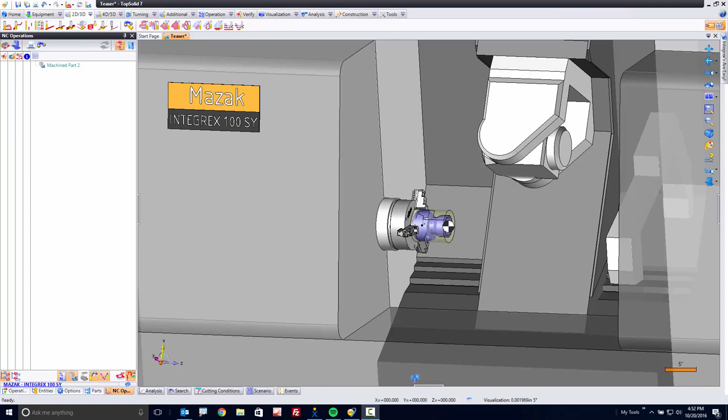Welcome to TopSolid 7. In this video, I'm going to briefly introduce you to programming a mill turn part on an Integrex 100 SY. This is the machine in question.

This is the part. Now, here I'm going to skip a few steps, and those steps are the loading of the part, the choosing of the machine, even setting up some of my tooling. But I will also tell you that I'm also working on a video tutorial that will cover every aspect of programming this part. This video is just a bit of a tease, just to let you know what's coming. So let's get started.

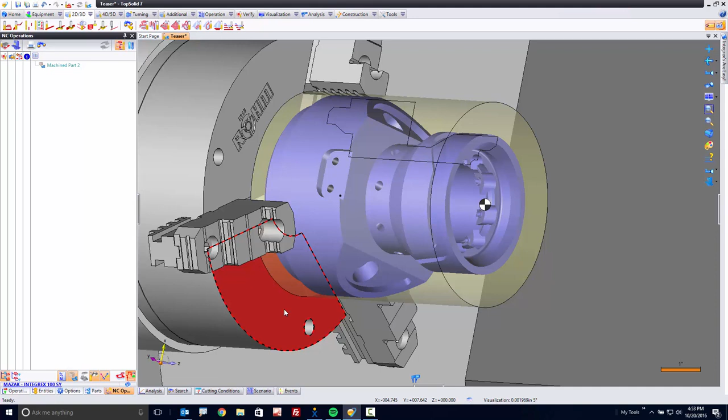To begin with, I'm going to go ahead and simplify a little bit of what I'm looking at. I'm going to go to my machine display here and turn off the ground elements. The ground elements are typically the non-moving elements. This way it's a little bit easier to see what we're doing.

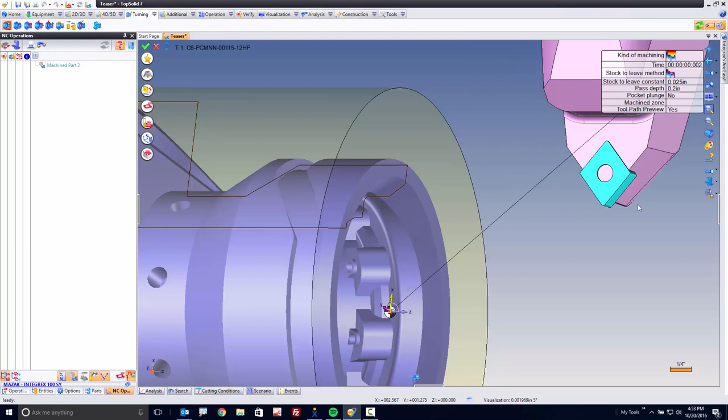Next, I'm going to zoom way up on my part here, right-click on that front face, and we're just going to go right to roughing. Now, if I put myself in a turning view, you can see I'm using a nice neutral tool. I want to machine straight down that way, but as you can see by the orientation of my tool, it's not good. It won't work. How do we change this?

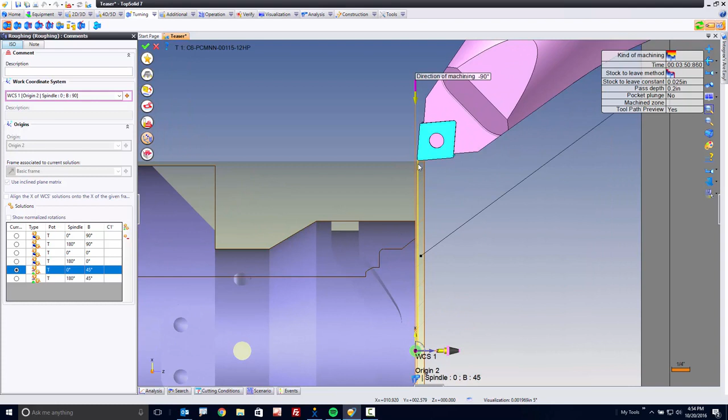We go here to our WCS solutions and we choose the angle we want to work at. So for example, I can set myself to 0 and 45 degrees. As soon as I do that, you can see the tool display updates, and moreover, you can see the tool path. Perfect. Over here, I'm going to set the stock to leave.

I want to leave 10 thousandths, and maybe my depth of cut, I want to set at 30 thousandths. Awesome. Next, I'll set my feeds and speeds. I want to work in feet per minute. So I'm going to come in here and say, you know what, I want 800 surface feet, maybe 20 thousandths per revolution. I'm going to set the maximum RPM to be maybe 3 grand in this case. That's it, I'm done. So I'm going to validate.

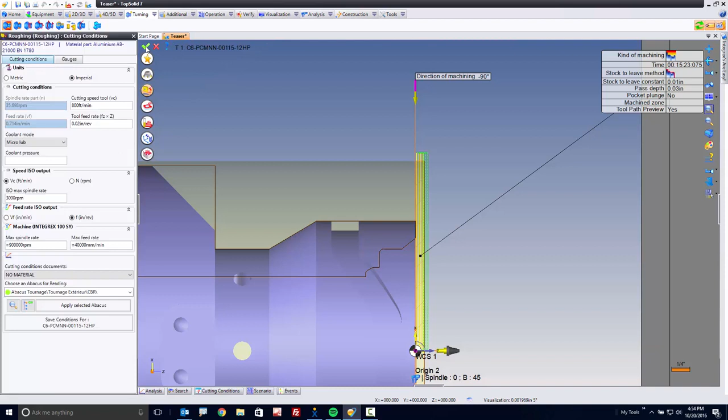TopSolid's going to calculate. It's going to go directly into simulation. I can zoom out and you can see I've turned down the face of this part. That's actually pretty easy. If you think about it, I'm using a complex machine and doing a very basic turning operation, but sometimes it's not so simple in some of the applications out there.

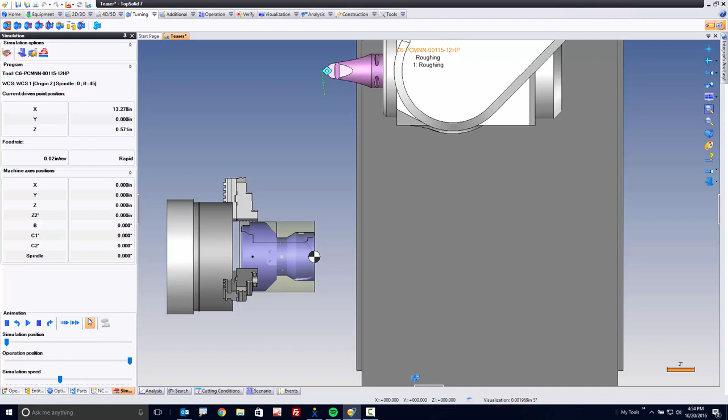Next, what I want to do is I want to continue turning. I want to turn from this face to here. So I'm going to select this face, hold Alt, select here, right click, roughing again.

Now in this case I want to reuse some of these settings, so I'm going to drag and drop down to here to use the same angular solution. I'm going to drag and drop down to here to use the same general settings. I'm going to drag and drop to here to use the same feeds and speeds.

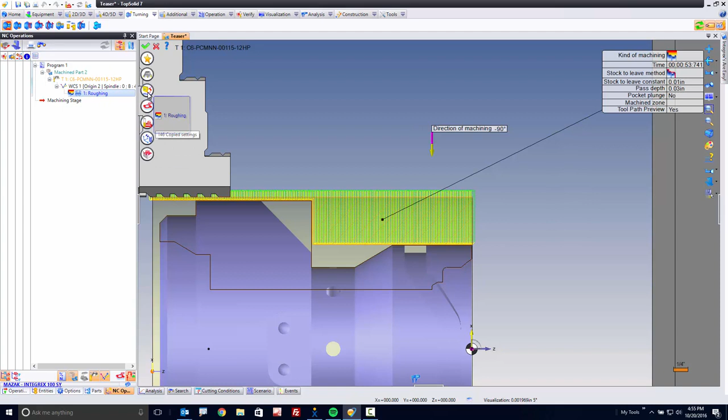About the only two things I want to change is my cut direction, and if I go into my settings, I want to stop my tool path before it hits my jaws here. One of the beauties of working in machine simulation like this, with all your fixturing present, is that you can see everything. It helps you make really good decisions.

Now, some might ask, why isn't TopSolid avoiding that? That's a great question, and the reason TopSolid's not avoiding it is because I simply have that option turned off at the moment. This way I can show you some manual steps in the solution.

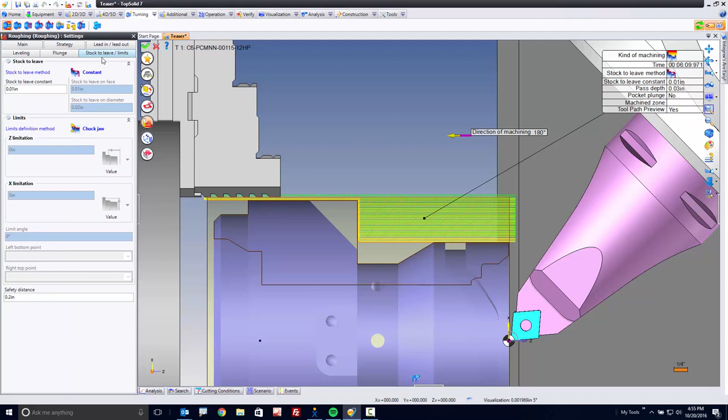So if I go to my stock to leave and limits, I'm going to turn off chuck jaw avoidance, and I'm going to go to my Z limitation. Now here, I can just type a value. I can say, you know what, -3. Let's see what that looks like. Maybe -3.5. Maybe a little bit more, -4. Perfect. I could have also switched to a point selection and snap to a point. You can do whatever you want.

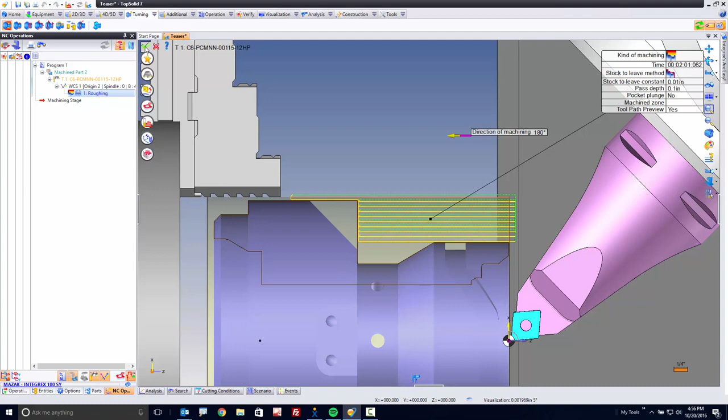The only other thing I'm going to change is I've decided I don't want that 30 thousandths step to cut since I'm turning down the length. Maybe 100 thousandths works better. And I'll say go. Like that, TopSolid's now going to update the stock.

Again, you're going to see that simulation do its thing. And we're done again. What I'm trying to point out during these videos is just how quickly and easily you can get things machined within the TopSolid solution.

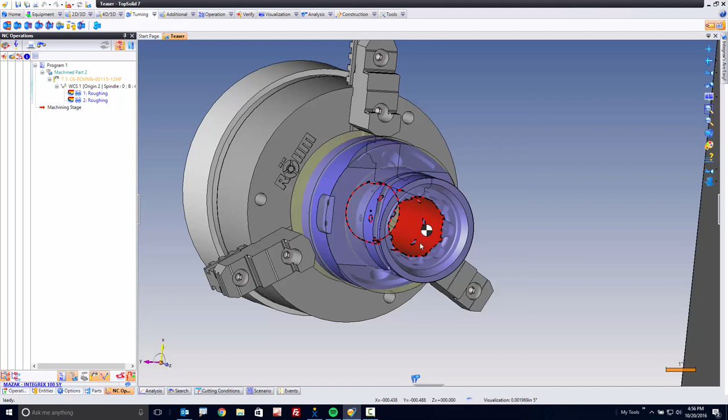Next, maybe what I want to do is drill down the center here. So I'm going to right click here, go to drilling, and choose hole machining. Now here we have a large diameter hole. And what I want to do is I'm going to use a flat drill that's 1.5 inches in diameter.

Go ahead and select that. Next, what I want to do is I'm going to tell it to take this all the way through the stock. So I'm going to change my geometry type to be through stock.

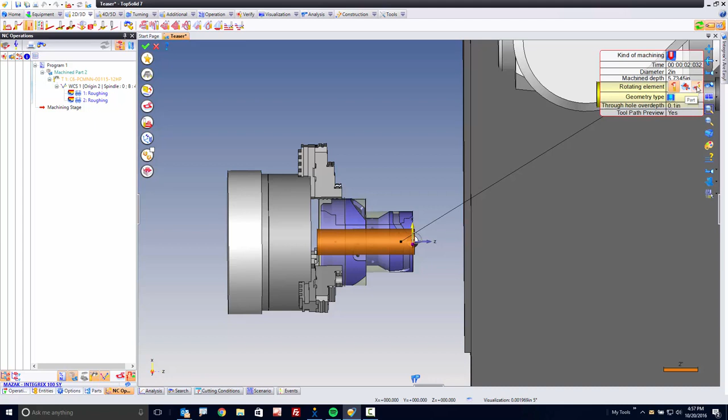Now the only thing I need to do is choose what's spinning, what's not. I can choose the tool is spinning, the part is spinning, or both. In this case, I'm going to let the part be the one that's spinning, and I'll give it speeds and feeds.

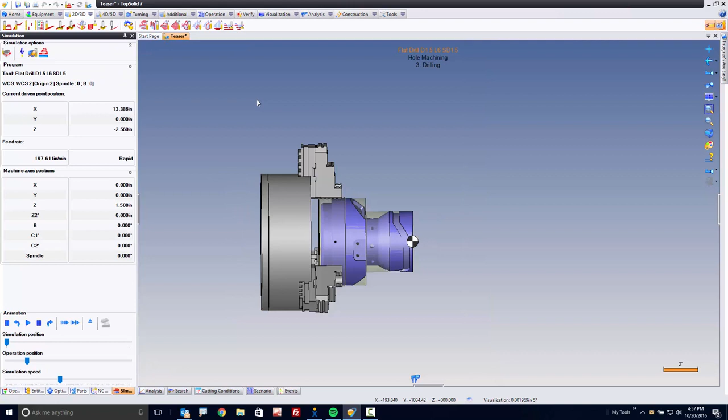You can see it's copied over from the last time I've used this tool. Then here you can choose whether you want a pecking cycle, clearing cycle, whatever—the choice is yours. But at the end of the day, even that operation only took a few seconds.

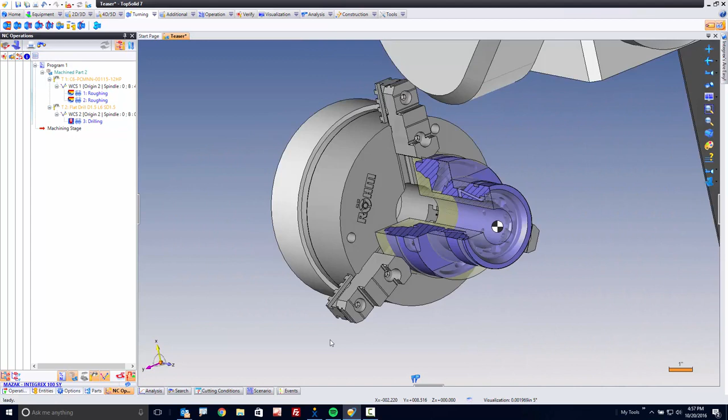Perfect. Now I'm going to go to my turning tab here next and turn on turning visualization. That's going to let me see inside my part. I can set the angle however I want, but this way I can see the ID of the part a little bit better, because now I want to machine from here, all the way to here, and do some ID turning.

So I'm going to go to roughing again. This time I'm going to switch tools because that tool is no good for me—I'm going to switch to this tool. Now when I switch to this tool, you can see it has a specific reach to it, and I want to machine along that direction.

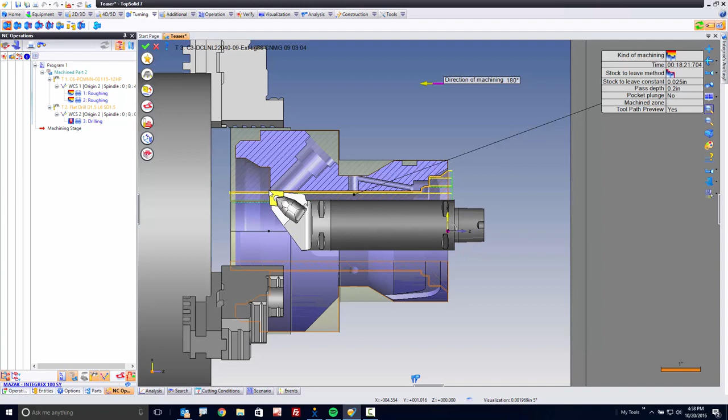Now you can see right here that the tool can't possibly reach all the way through the stock here, so we need to set another limit. How do we do that? Let's go back to settings, and here we'll go to stock to leave limits.

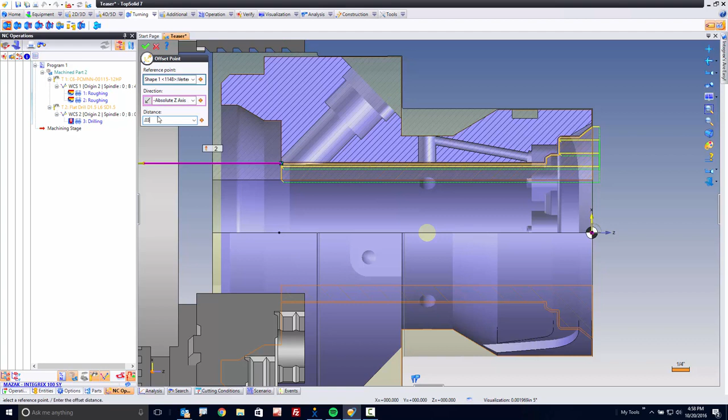We'll say in Z again, and this time I'll go to a point. Now the way you can do this is I could just select on the model like that, but you probably want to go a little bit past that. So look how easy this is—I can create an offset point from here relative to my Z axis, in the opposite direction, for 30 thousandths, for example.

Now I have a point that's going beyond my detail just a little bit. All the rest of my settings are exactly as I want them. If I hold this here, you can see I'm good—I shouldn't have a collision, but you know what, I want to be really sure.

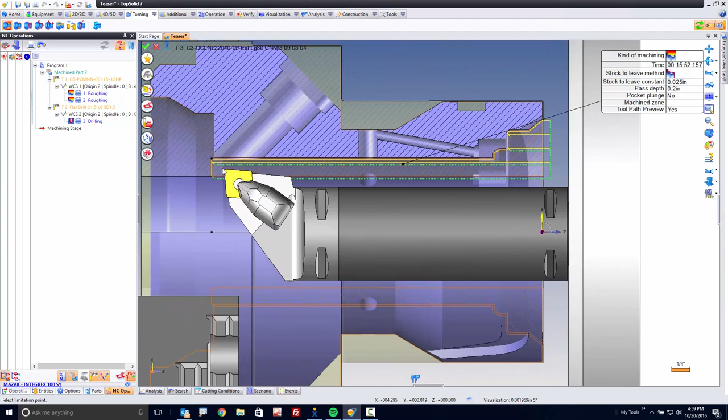It'd be really cool if we could turn on the machining head at the same time and drag that around. Let's zoom up here and have a look. Well, cool—I don't have a lot of clearance, but I have enough to reach this part with my current configuration. This is one of the cool factors of TopSolid; you can visualize everything extremely easily.

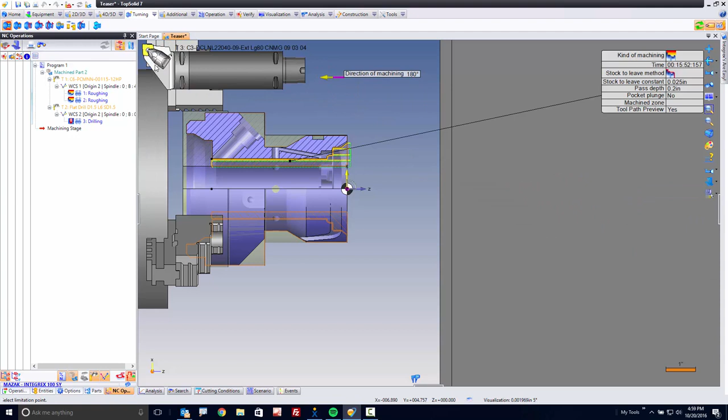All right, we're done there. Let's go ahead and say OK. We'll watch the simulation come in—the tool's going to come down, and I'll slow this way down so we can see. If I zoom way up on this, we're going to get close, right? But no collision found. Fantastic. Rough, rough, rough, and away we go.

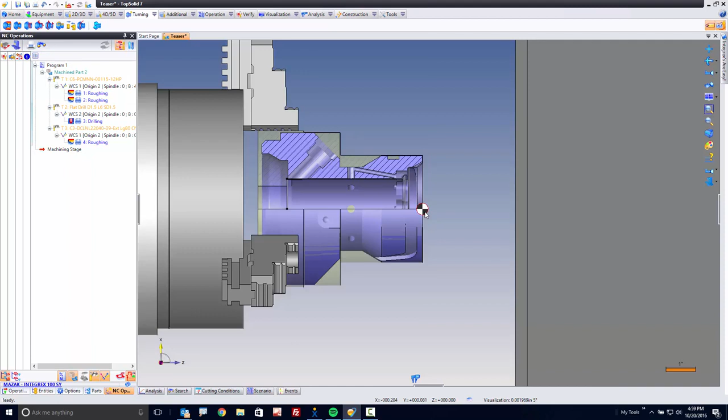All right, now next I want to go ahead and create some finish turning. So I'm going to finish turn from here to here again, and I'm going to use that same tool just to keep things simple for the demonstration. You can see it's going to come in, it's going to turn, it's going to be done.

Nice and easy. After that, what I want to do is finish turn the outside. So I'm going to rotate this a little bit, select this face, and finish turn up to here. So let's go here and we'll go to finishing.

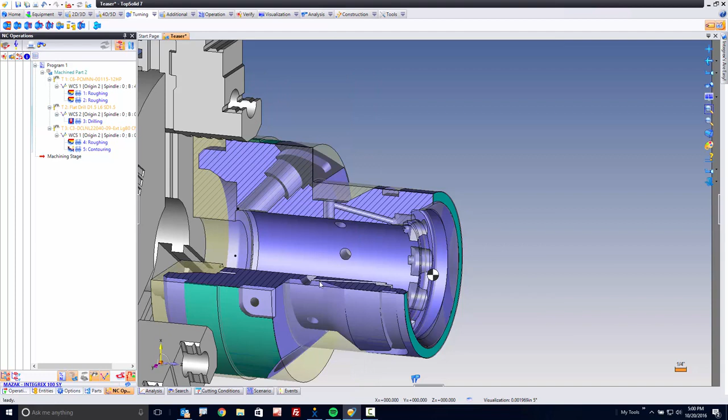Now in this case, I could of course use this tool—you can see it oriented vertical, and technically maybe it would work, but that tool's sticking out a long way. So I'm going to tool change, go back to my neutral tool, and grab that 45-degree orientation. Then I'm going to go to my lead in and lead out and show you some other options you have.

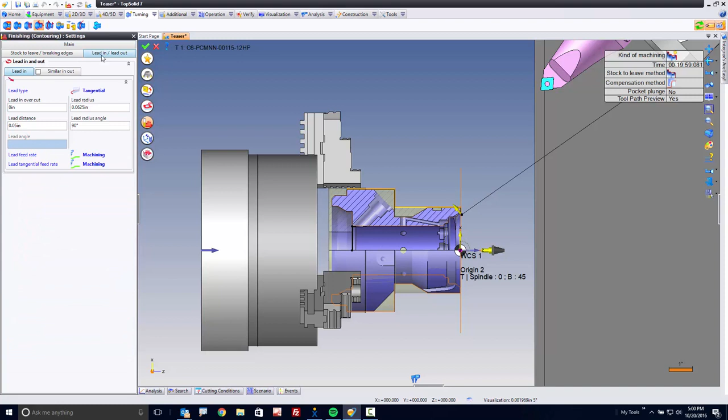So for my lead out, for example, I want to step back a little bit—I want to be -1 inch or -0.875. There are other ways to control this. Again, I'm just showing you that you have freedom in TopSolid to just tell it to do something, and it listens.

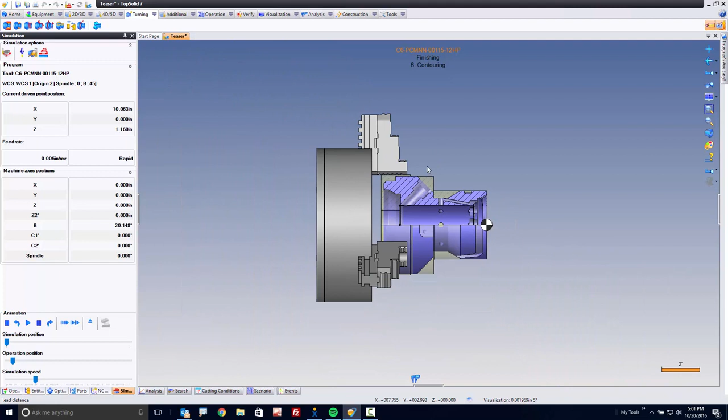That's awesome. Now that we've got that done, we have one more turning operation to deal with, and that's this operation here. So what I'm going to do is select this face to this face, and go to roughing. In this case, I'm going to switch from general roughing to what we call groove style roughing. We'll look straight back at it again, and now let's go pick our groove tool.

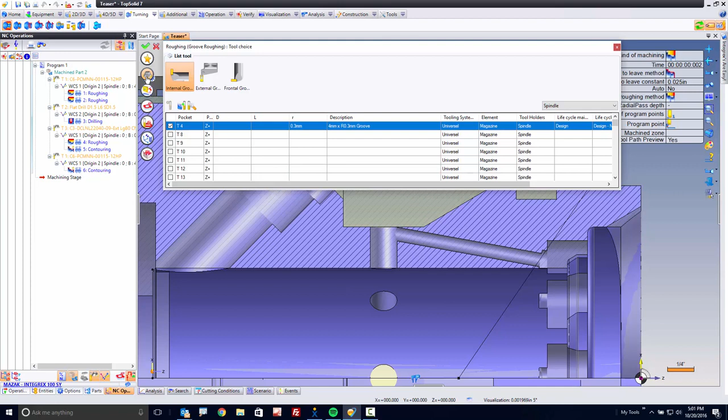Now when I pick my groove tool, you'll see it pop up here, and you can see how the tool is oriented. Well, this won't work very well because we're going to run into things, so I need to come over to here and ask the software to just rotate 180 degrees. Perfect.

Now we're good, but I'm driving by the wrong point, so let's change my program point to be the outside point. Awesome, and from there you can choose any type of cycle you want. Here it's just doing a plunge type of method.

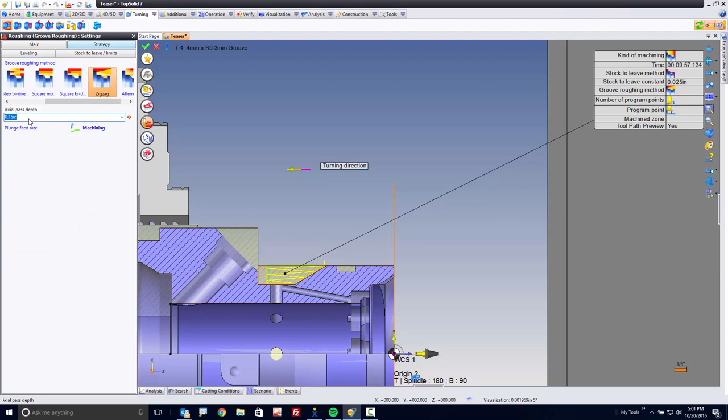Maybe we could do this a bit more interesting. Let's go here and do a zigzag, and let's say it's 60 thousandths. You can see it's zigzagging back and forth, and then it's going to level out and machine our profile. I'm hopping all over the place in a couple different styles of machining just to show you how simple it can be to program even a complex machine such as this.

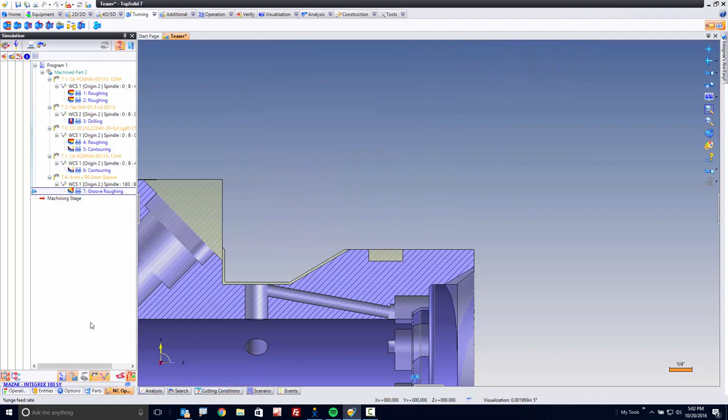Last step we have to do is finish that face, so let's go ahead and do that. I'm going to select here to that face, go to finishing, and switch back to that groove tool again. Look straight at it, and I'm going to use the same orientation the tool is already on. I want the tool inverted, which is perfect. Now I'm going to tell this to finish from two sides, so I can plunge down this way with the tool, pick up, come over here, plunge over, pick up. Let's have a look at that.

Again, simplicity is the key. If you can't process your parts quickly, software isn't worth using.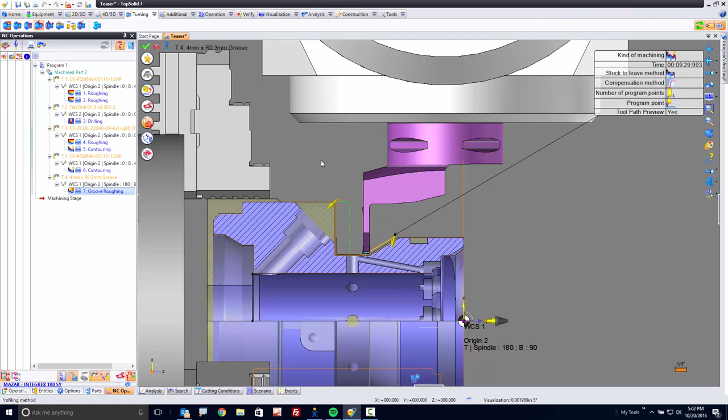So here you can see the simulation. Now it's going to pick up and go down that vertical face, blending everything together beautifully. Okay, that's it for turning. In a few short minutes, I was able to do a majority of the turning on this first setup.

Next, it's time to do some milling. To make the milling a little easier to see, I'm going to turn off that turning display. Let's start doing some milling.

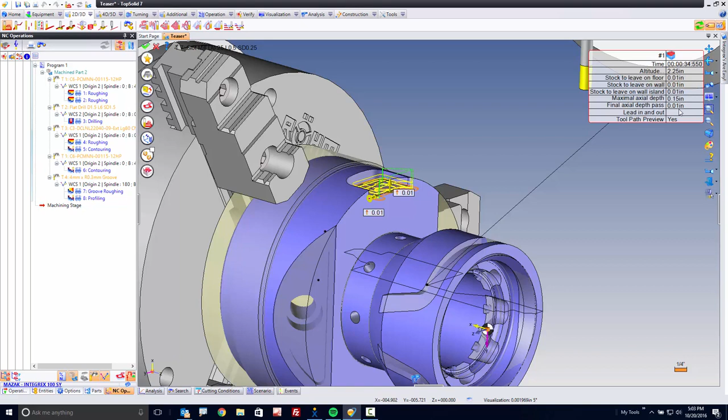I'm going to select this face here, right click, and go to End Milling. It's going to be nice and simple. You're going to see we stick the tool into the right orientation right off the bat. I'm going to say I want to leave 10 thousandths on the floor, 10 thousandths on the wall, and no spring pass here. Maybe I want this to be, I don't know, 1/8 inch depth of cut even. Perfect, we can set our feeds and speeds.

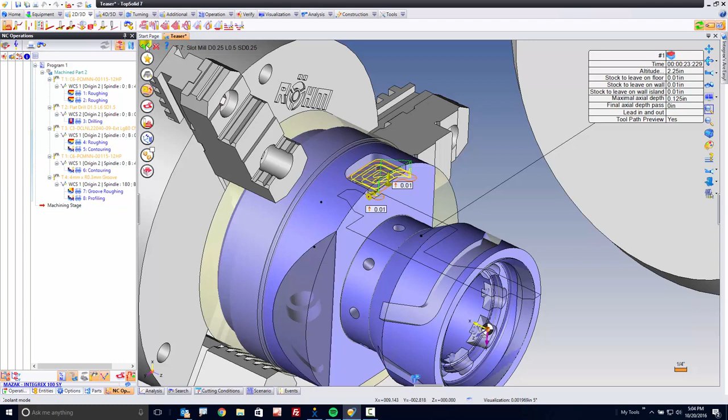By the way, to the keen observer, you'll notice I didn't set my plane, did I? Check this out. Because TopSolid fully understands the kinematic capability of this machine, it's able to automatically find the right angular solution for you for all your 2.5 axis milling on 5 axis positioning. Pretty cool. So we found that orientation, we did the tool path, we roughed it out. What's next? Well, what's next is this.

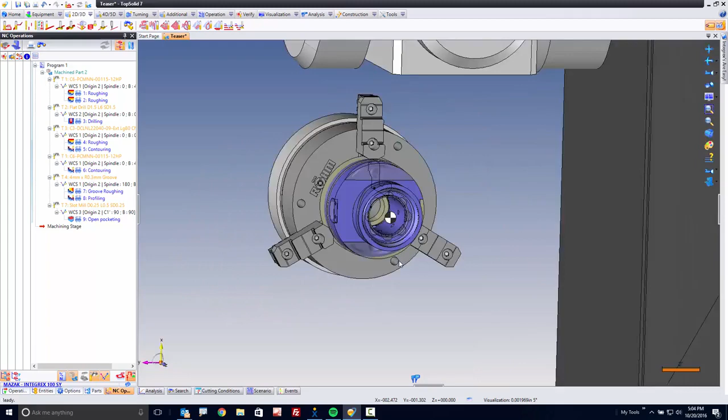On this side of the part, it has a cousin — there's another pocket on this side. Check this out, that's the tool path we used over there. Wouldn't it be awesome if you could just hold the control key down and drag and drop the tool path over to here, and TopSolid would automatically find the new angular solution and create the tool path? We thought it'd be awesome too, and that's why we did it.

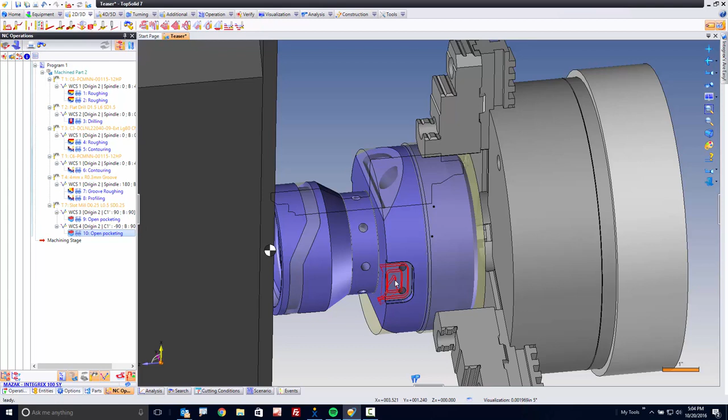In fact, all we're doing is harnessing the power of Windows here. Now I'm going to drag and drop to this face. Perfect, it's going to update there. Now, when we update here, notice it's creating all the tool path based on the real stock. We're cutting zero air here. Again, a fantastic feature of the TopSolid platform.

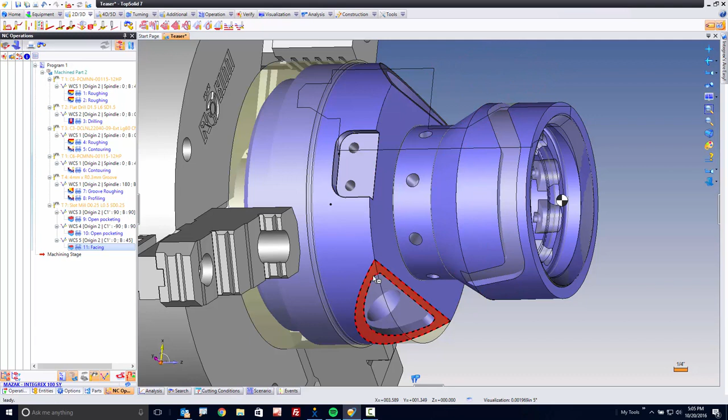Let's do one more. Let's drag and drop this one down to this face, and now that's roughed out. Even better — last step I'm going to do in the world of multi-axis machining.

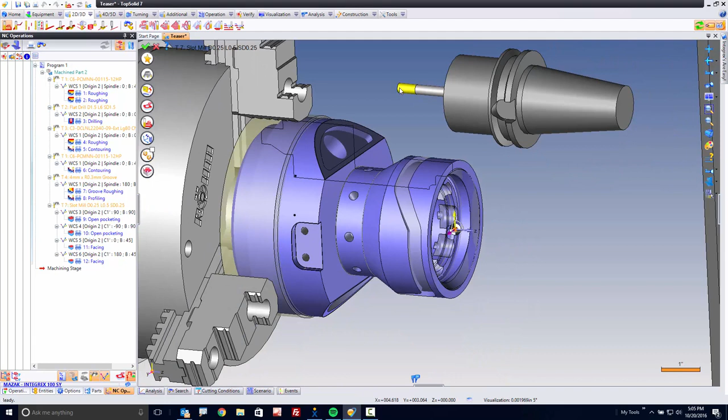Let's machine a 4-axis slot. Select it, right-click, and under 2D we still go to End Milling. We don't go to a special command just because the pocket happens to be wrapped around a cylinder. Instead, we just have to tell TopSolid we need to use multi-axis tools. So I want to use 4-axis radial machining.

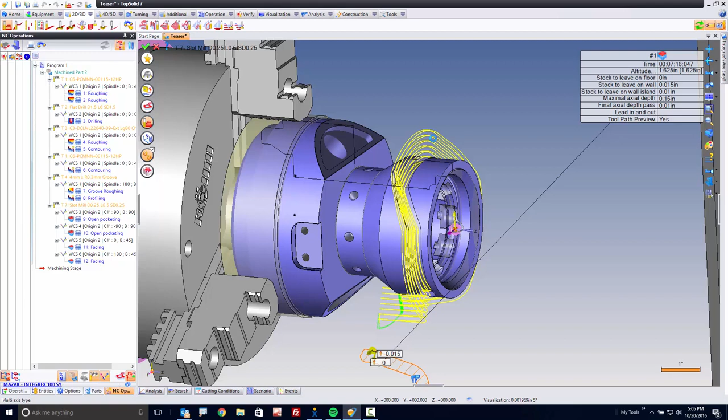I'm going to see it update here in a sec. You can even send a cycle — we support 4-axis radial cycles here, which is awesome. Now, in 4-axis radial mode like this, you do have to help TopSolid out a little bit. It doesn't know the start altitude. All the other ones it's able to figure out, but in 4-axis continuous, sometimes it gets a little confused.

So if I go to my altitudes here, I can go to my starting altitude, switch to point, and check this out — all I need to do is select a point on the model, and it'll find the right altitude. The other thing I want to point out, notice it's plunging where there's no material automatically. I mean, that's just awesome.

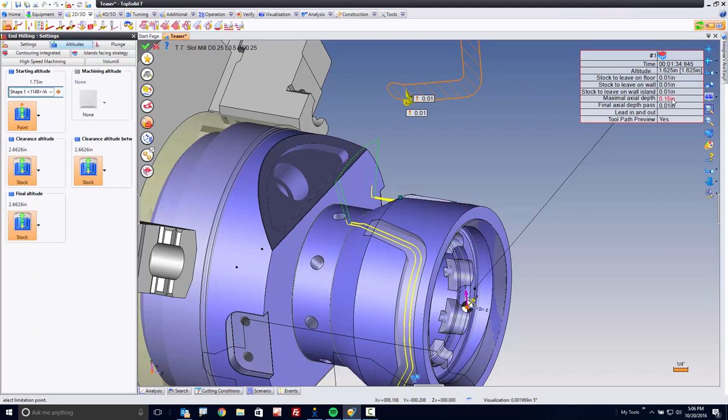Let's say here we want to leave 10 thousandths on the wall, again 10 thousandths on the floor. Let's say everything else, we don't need a skim pass there — one pass is enough for roughing sake.

And now let's watch. So now we're going to orient the tool, we're going to pick up, and we're plunging inside the part there where there's air, and we're cutting in 4-axis continuous.

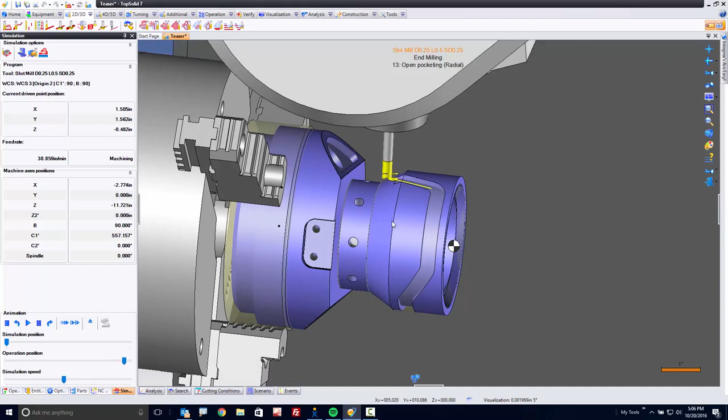Awesome. And think about that - I didn't have to recreate geometry. I didn't have to draw anything. I didn't have to unroll anything. All I did was process. That's the whole idea with the TopSolid platform.

Last thing I'm going to show you in this video, since we're about 13 minutes in now, I'm going to do some milling on the front end here. I'm just going to pick one of these faces to machine. I'll pick right here, and go to End Milling again. Boom, check that out - it found every single pocket. Every one. That's awesome.

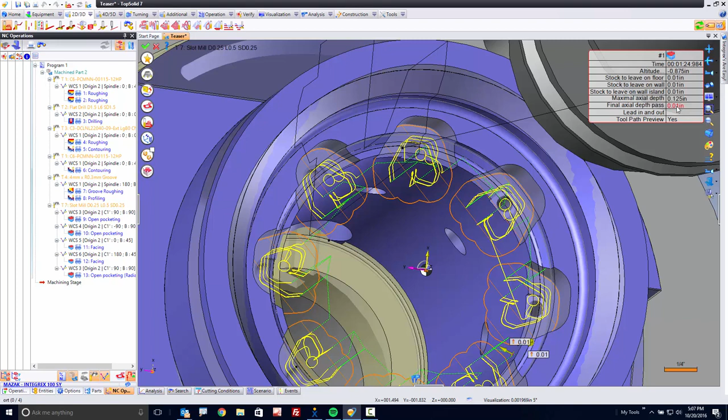I'm going to set my stock to leave again. By the way, I could have all of these defaulted, but if I had them all defaulted for the video, honestly my demo would go so fast you wouldn't know what I did. Check it out - boom, now I've just roughed all those out.

Now something interesting is happening here. I don't know if you guys caught it or not, but I had a red value here in the simulation. Let me stop it, rewind it, and start it again. My y-axis is over traveled. Huh. Now we're back into the right zone.

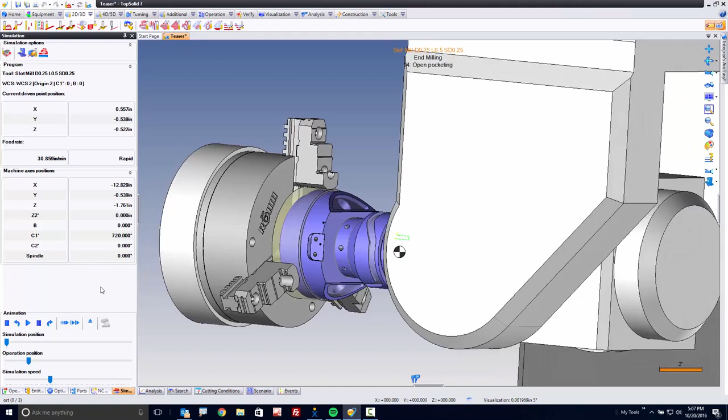As we get this around to the other side of the part, we're going to over travel x as well. I know this because that underline right there is telling me, and here it's telling me a couple of the axes are over traveling. I can go into here and look - I can say, what are the strokes of this? And x and y have over traveled. Well, think about it, that's just...

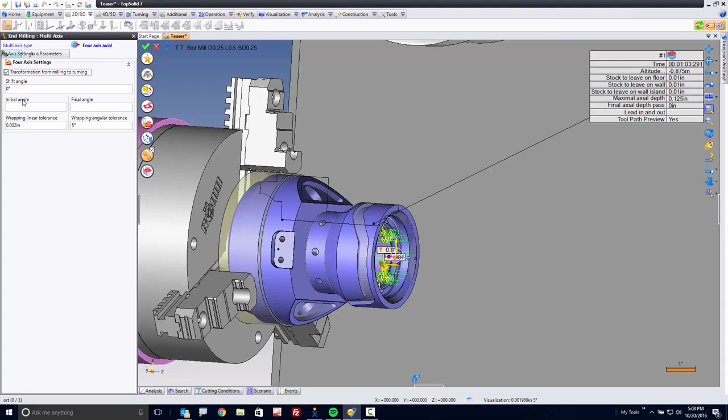Awesome. How do we fix this? Well, we can get rid of one of these, or solve one of these, by going to polar coordinates. All I have to do is activate multi-axis. I'm going to initialize the angle to 0 and hit go. Now it's going to recalculate, and now we got rid of the x-axis over travel.

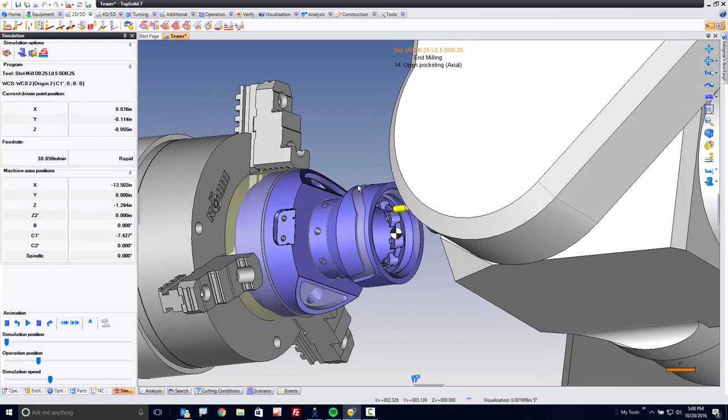We still have a y-axis over travel to solve, and I'll show you how to solve that too. But now you can see we're just using the c-axis to machine those pockets. Same simple command, and we were done. Awesome. How do we get rid of the y-axis over travel? Well, let's have a look.

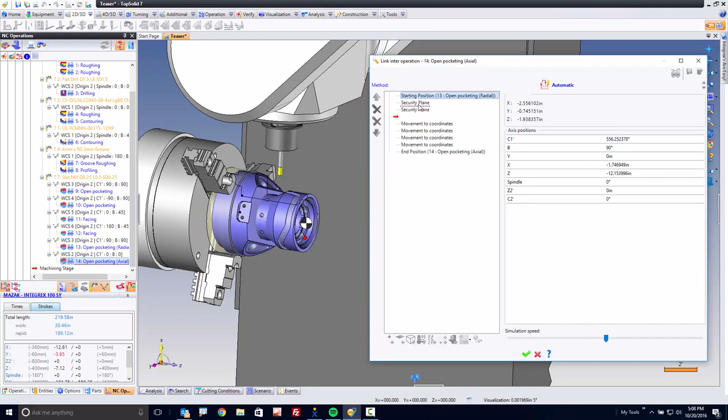I'll bet you the y-axis travel is happening in what we call the link movement. Sometimes link movements can be challenging. Thankfully, TopSolid gives you the ability to tell it exactly what you want to do. So look, here we're moving to this plane. I'm going to turn off automatic because I'm going to solve something. It's this movement here that's over traveling y - I know that because that's underlined. So let's just get rid of it.

Perfect. Now in this case, the tool moved out to a security plane here, which is fine. And then it's going to rotate B and C, and then it's going to position back, and then - you can tell it to do whatever you need it to do.

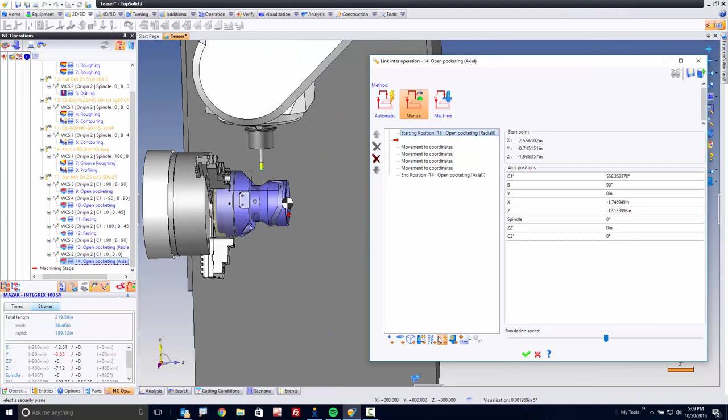For example, maybe here you don't want to use the plane. Fine, let's go here and do a movement to coordinates. Watch - what I'm going to do is approach in my part frame, in the z value, based on the ending point plus 5 inches. Just want to get it out there. Maybe even 8 inches, why not? Cool. Then watch what happens.

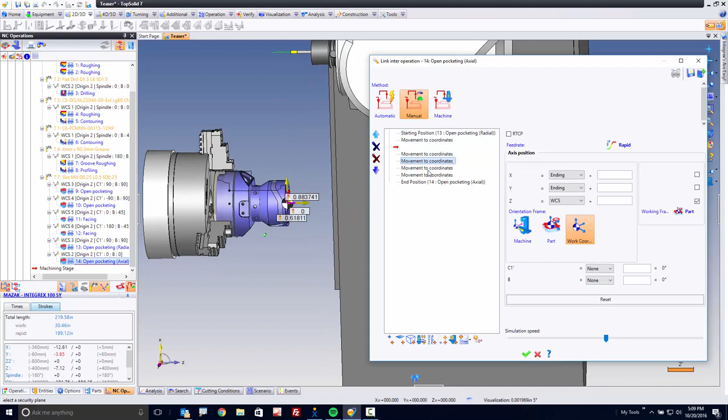Then we're going to rotate up, and then we'll be coming down and over and away. But like that, we have now solved the over travel alarm. Let's recalculate, and we're done.

No more over travels. Working with software that really understands your machine, understands what it's mechanically capable of, and gives you the tools to be able to program that machine with efficiency, is the only way to drive machines like this.

Finally, the proof is always in the pudding, right? If the simulation is pretty, that's one thing, but if there's no G-code, there's no point. So the last step I'm going to show you - I'm going to come up to here and go to Generate ISO. In this case, I'm going to post for an Integrex J-series with a matrix control. I'm going to hit go. And like that, you now have all the G-code needed to do everything that we just programmed within TopSolid.